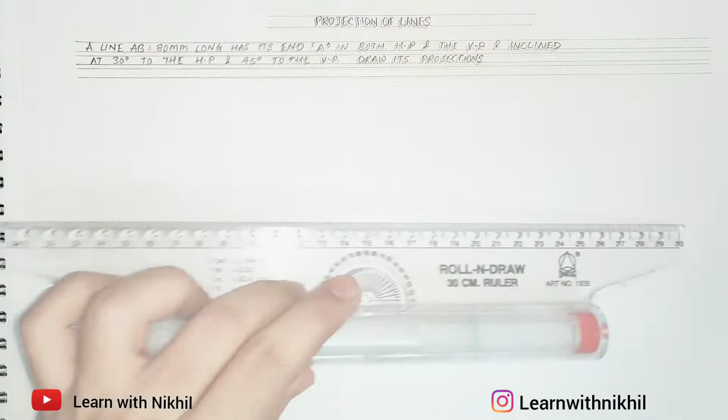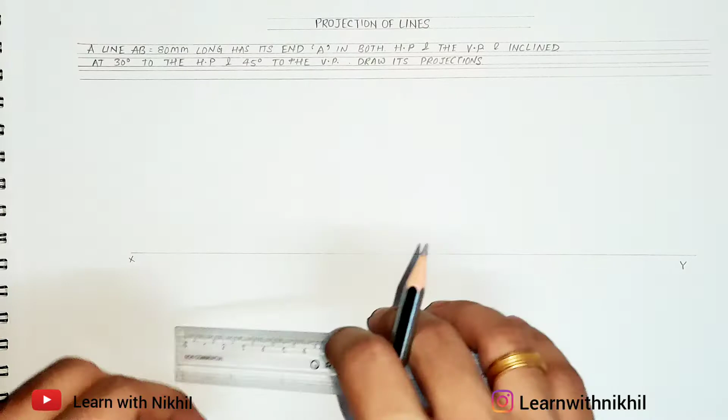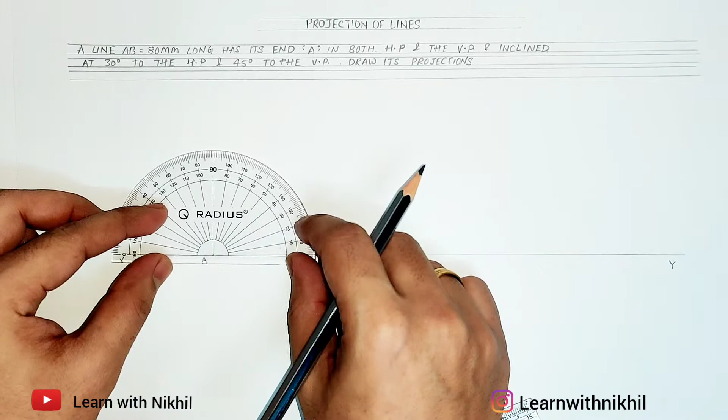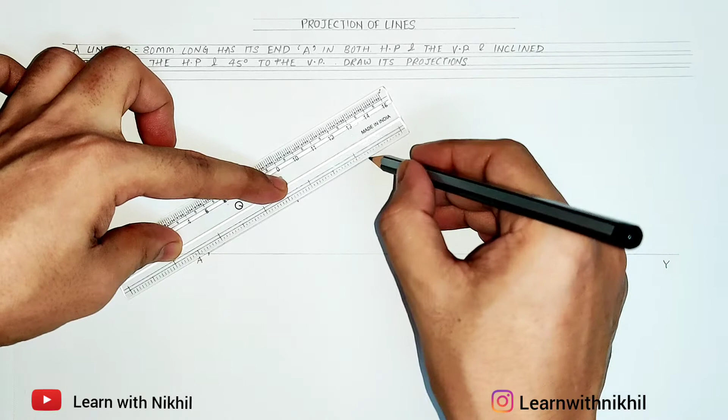So moving towards the solution, first we'll draw a horizontal straight line. This will be the XY line. Now the point A will be on the XY line, as the end A of the line AB is on both HP and the VP. So this is the point A. Now it is inclined at 30 degrees to the HP. So I'll mark an angle of 30 degrees. I'll draw a line. So this is the line at 30 degrees, this angle.

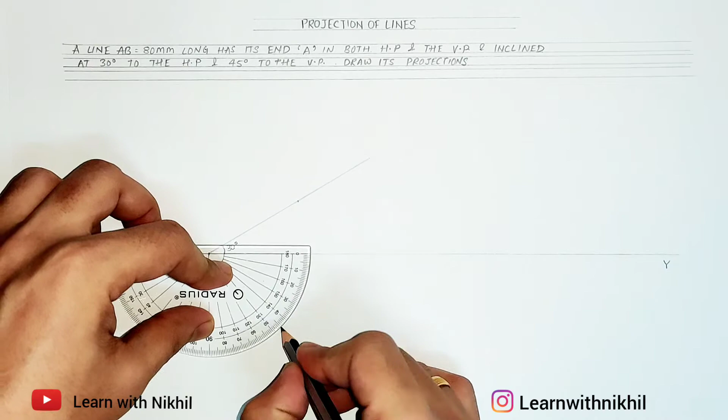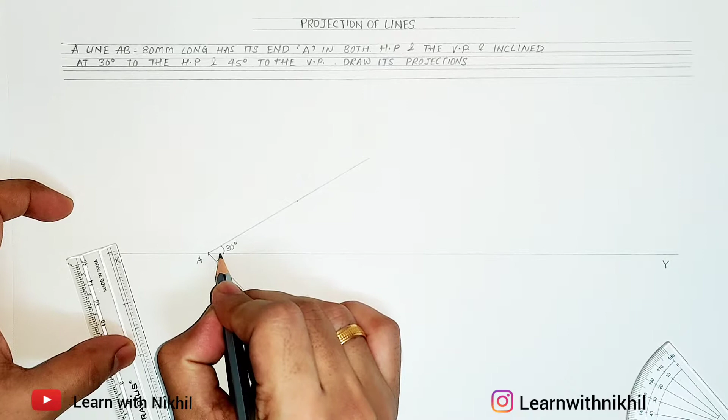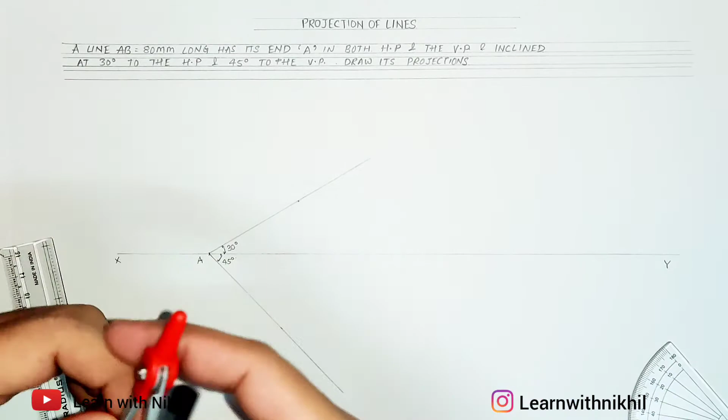And 45 degrees to the vertical plane. So on the bottom side in the top view, an angle of 45 degrees. This angle is 45 degrees. So for the true length in the front view, theta is 30 degrees, and for the true length in the top view, phi is 45 degrees.

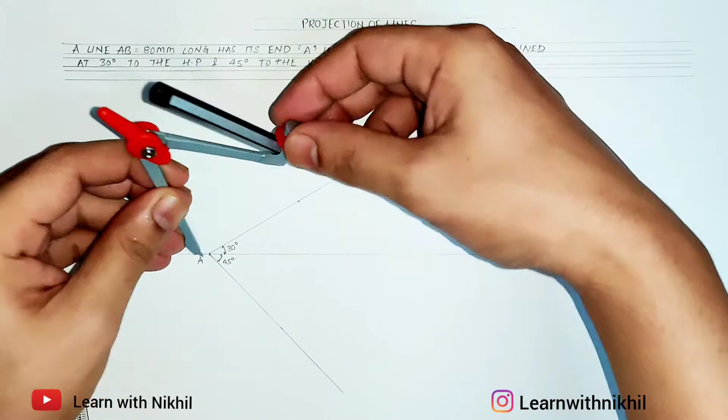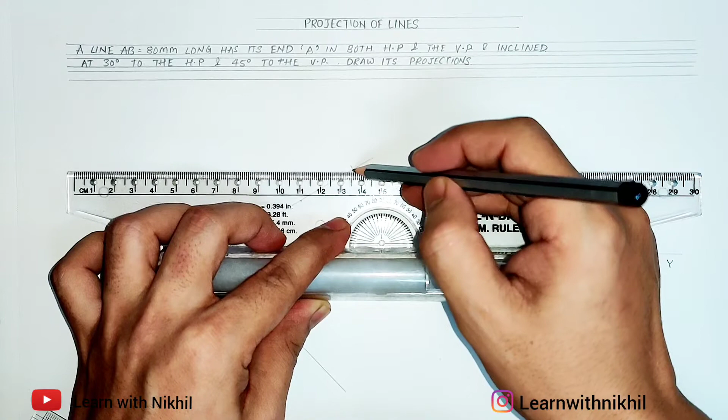Now on the compass, I'll take the true length distance of 80 mm. Keep it on A and cut an arc, as this line is the true length. This point will be B1 dash. Through that point B dash, I'll draw a parallel line. That will be the locus of point B dash. So through this point, I'll draw a line. This is the locus of point B. This is the true length that is given, 80 mm.

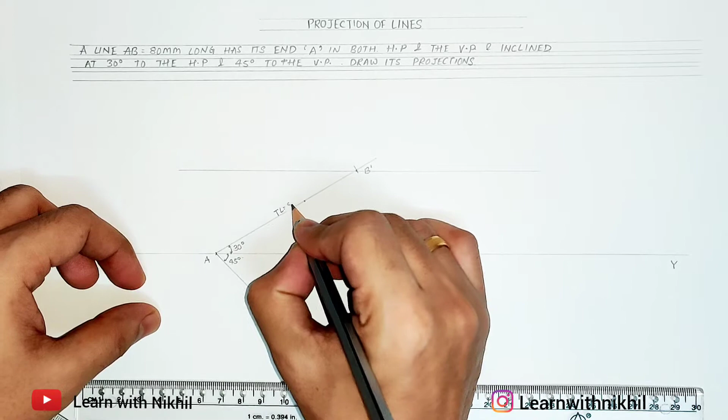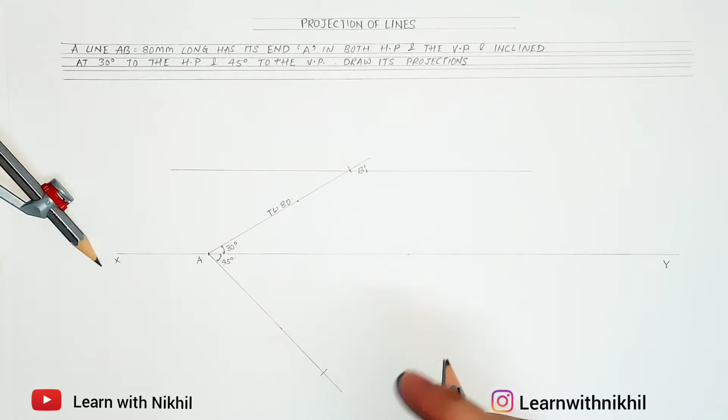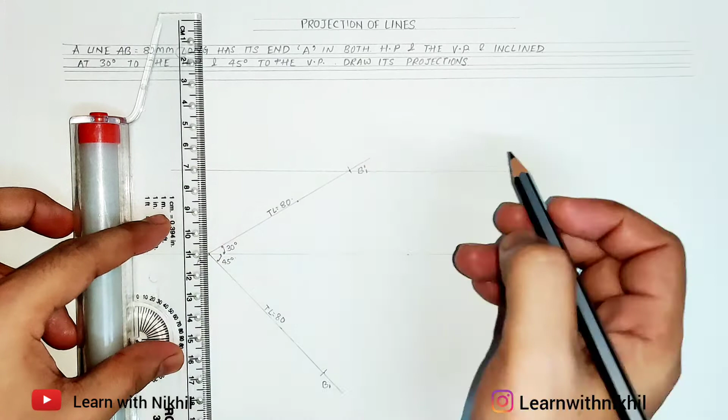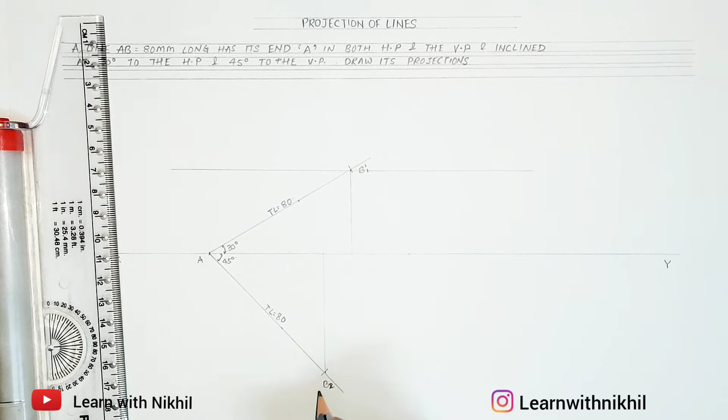Now the same true length, we will mark it here. This is B1 dash, and the true length, this is again 80 mm. This is point B1. Now I'll draw lines from B1 dash and B1 towards their opposite sides, intersecting the XY line. Now we have to find the front view length and the top view length. This intersecting point, I'll give it as B2.

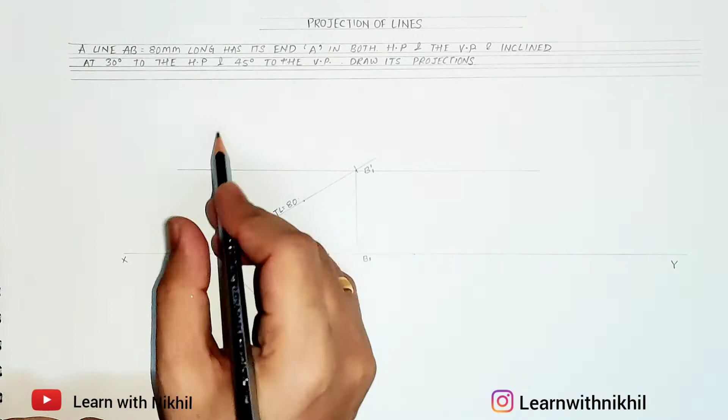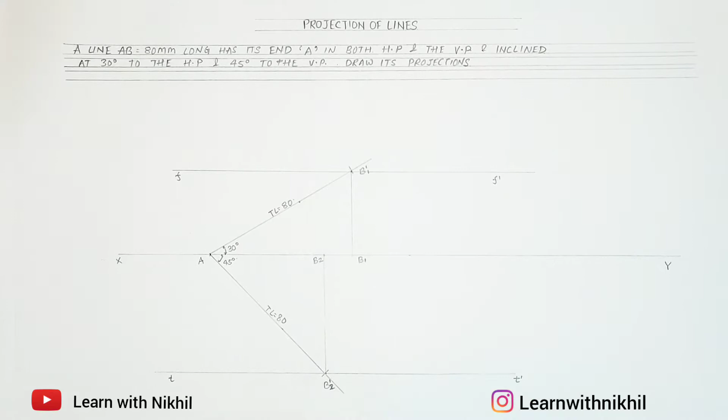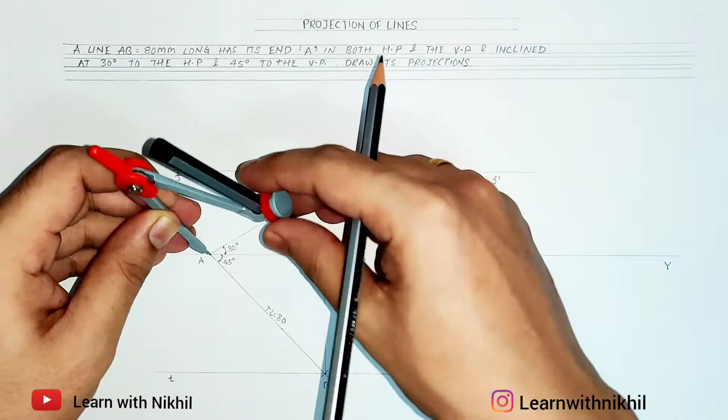I'll mark this locus as FF dash, and also I'll draw a parallel line from the point B2. This is the locus of point B. I'll mark this as TT dash. On the compass, I'll take the distance from A to B2. Draw the curve touching the upper line. Now this distance is the front view length. I'll draw this dark. This I'll mark as B dash.

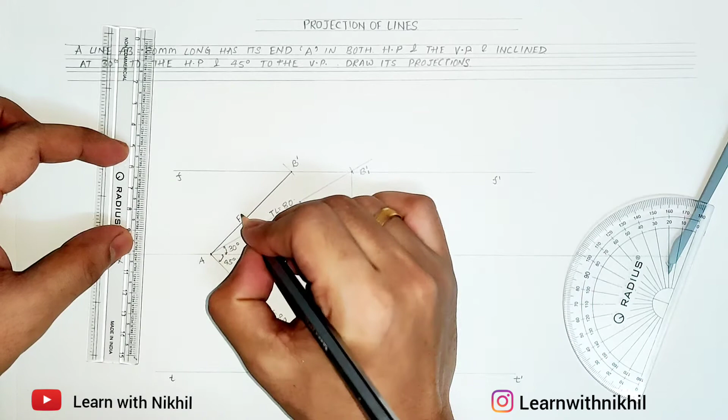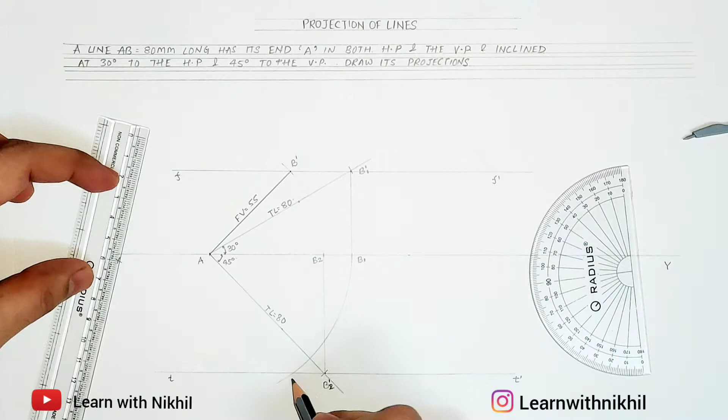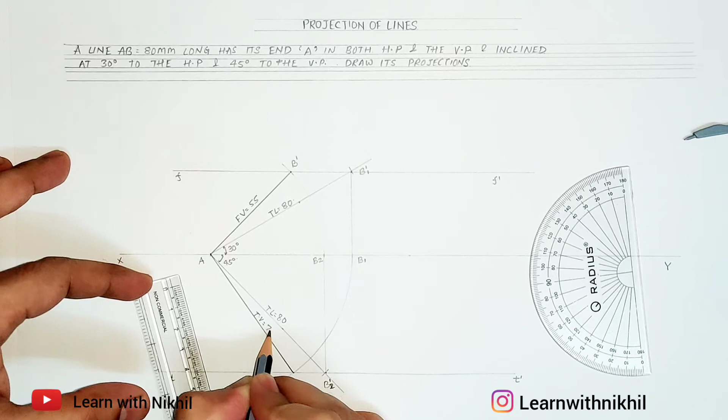This is the front view length or the elevation length. I'll measure this as 55 millimeters. And with the same procedure, taking this distance on the compass, I'll draw an arc cutting the bottom line. Joining these 2 points, A to this point is B, and this is the top view length or the plan length. It measures 70 millimeters. This is the horizontal plane.

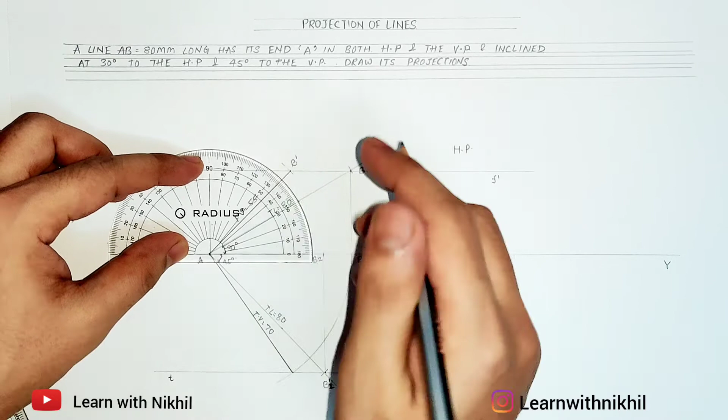The question says only to draw the projections, but I'll find out the angles of inclination also. So this inclination angle in the front view is denoted as alpha and it measures 45 degrees. Same in the top view, this angle is 55 degrees and it is denoted by beta.

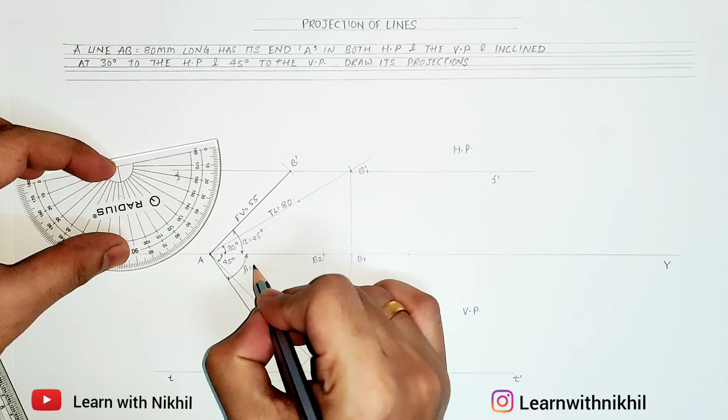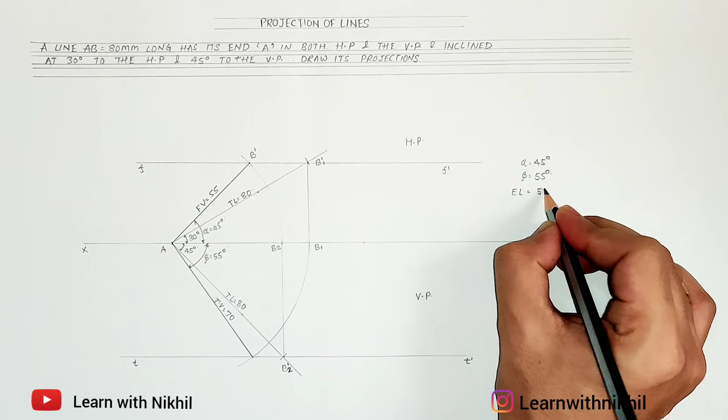I'll just write here all the angles. Alpha 45 degrees, beta 55 degrees, front view length or elevation length is 55 millimeters, top view length or plan length is 70 millimeters. And we are done.